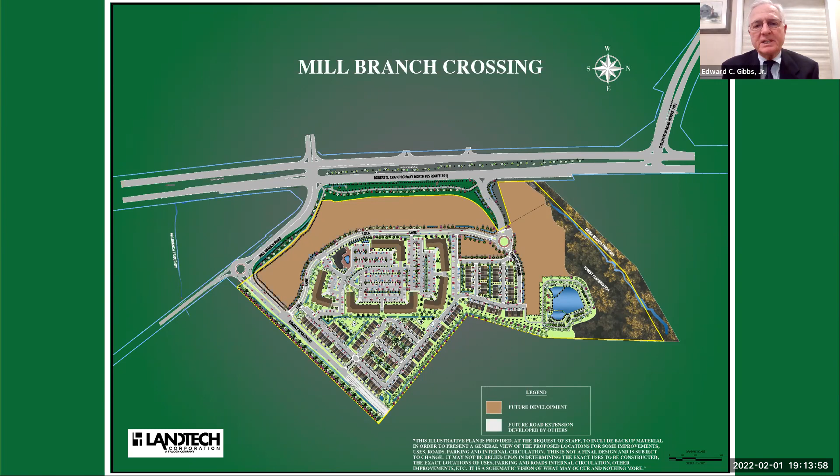The multifamily component of the project really is immediately abutting the east side of Lola Lane. Mr. Hoag, if you could help me out on that one. As you come down Mill Branch Road and hit the circle and turn left to come in on Ridgely, you will see the first intersection on your left will be Lola Lane, another private road. As you turn left onto Lola Lane, the multifamily units will be on your right side, and so you see them depicted here.

It's pretty interesting. The arrangement is 6 buildings, all U-shaped in their configuration. Then up in the upper left-hand corner, you'll see a smaller building, which is the Clubhouse, about 10,500 square feet in size.

So you see parking in front of the buildings. There is surface parking, but each of the 6 buildings also has underground parking in a garage. Approximately, and Kim Morgan can correct me if I'm wrong on the exact unit count, it's approximately 408 multi-family units. Am I off by a few there, Kim? No, Ed, you're exactly right, 408. Okay, thank you very much.

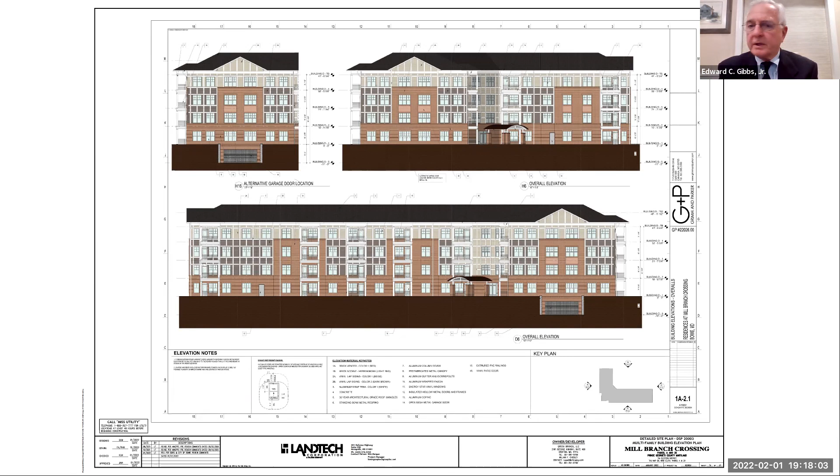Mr. Hoag, if you could go back to the immediately preceding one, there we go, thank you. So what you see in the middle there is the multifamily, and I will say that the clubhouse, which again is in the upper left-hand corner of the section, is right there.

There we go. Thank you, sir.

So that's going to include a fitness center, meeting rooms, community rooms. There'll be a yoga facility, and it will also include a swimming pool. So it's going to be pretty doggone nice.

I will say that the recreational amenities for the multifamily will only be available to the multifamily residents. They won't be available community-wide, because the multifamily builder is paying for that and including it in the project.

And then if you look at the drawing that we have up in front, you'll see a number of what look like rectangular shaped lots, basically on all sides of the multifamily component. Thank you, Mr. Hoag. And so those are 190 residential townhomes. They're all fee simple, to be sold and owned.

And all of the internal streets that serve those units are private, will be privately maintained by the developer during construction, and ultimately, once the project is turned over to the homeowners association, the private roads will be maintained by the homeowners association.

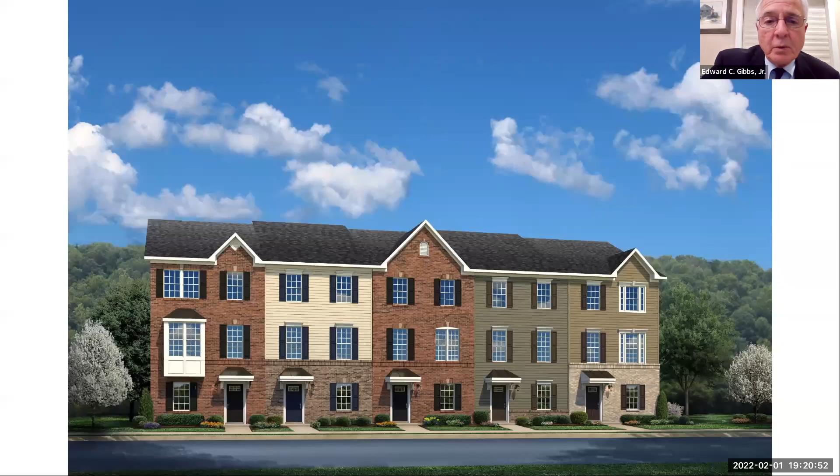And if I could, Mr. Hoag, if we could just move into the elevations for the townhomes as well, please. So we just have a sort of a sampling of all the different builders who have submitted elevations to be part of this project.

So it's quite nice. This particular elevation that you're looking at will be what we call a rear entry. So if you notice, there's no garage in the front. The garage will be in the back.

Well, but it's just a nice change of pace and gives a different look from the street, and I think adds certain character and charm to the community.

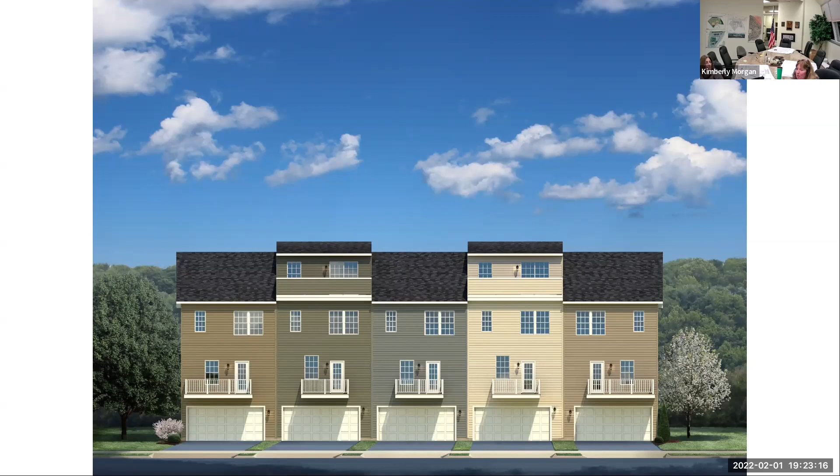They all have balconies, and some have special features up on the 4th elevation. You can see 2 of the units have special features up there. Are those actual walkout balcony units up there, Kim? No, I don't believe those are walkout units up there. Okay, it's like a special room. I think the architect told me that that's one of the places where people could have a home office. Oh, good. Okay, all right.

If you could slide down to the next one, Mr. Hoag.

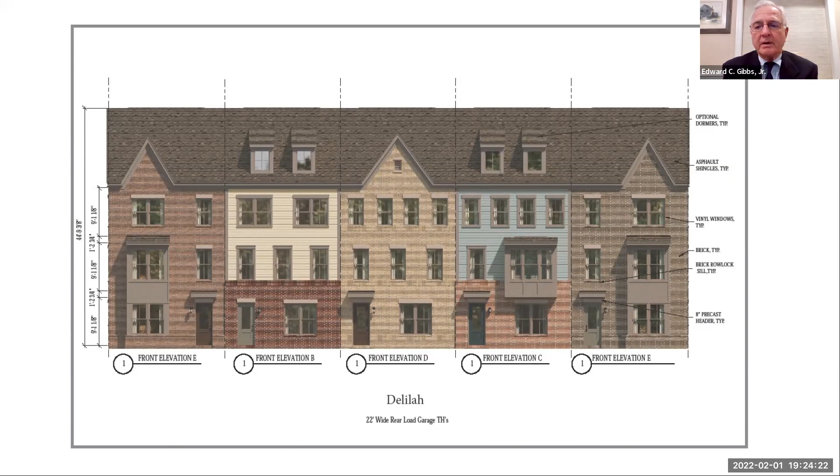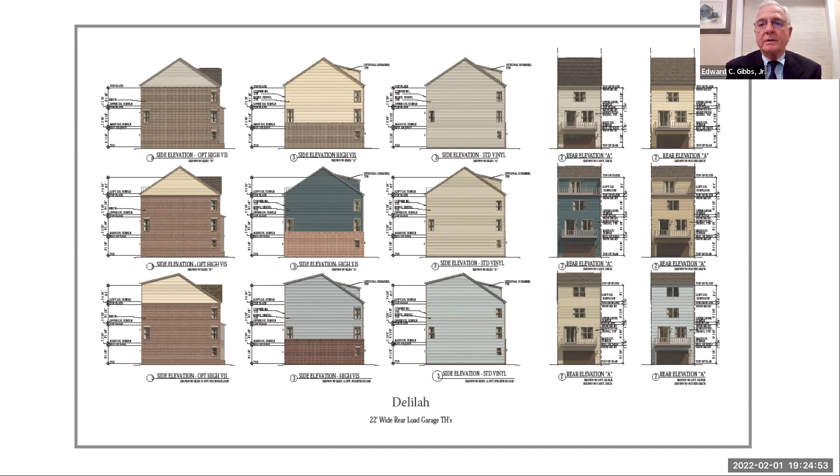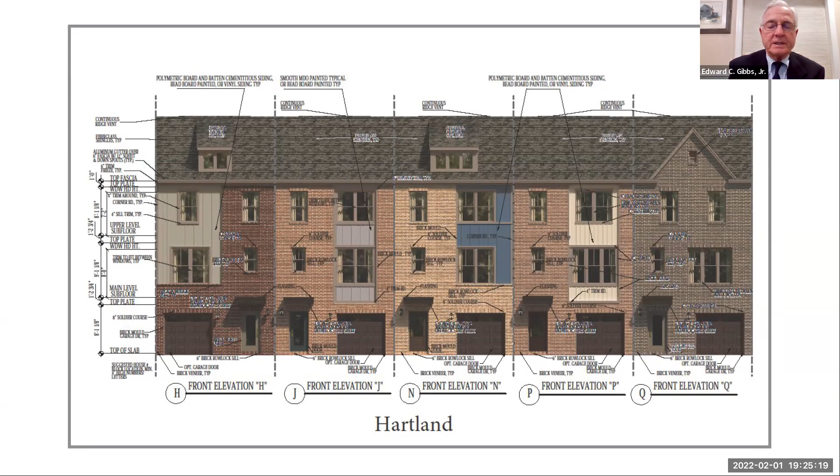If you could go to the next, Mr. Hoag. This is just a derivation of the Delilah that we saw immediately before, but the treatments are very similar from the standpoint of architectural shingles on the roofs and brick and siding combinations and fenestration that populates the facade readily.

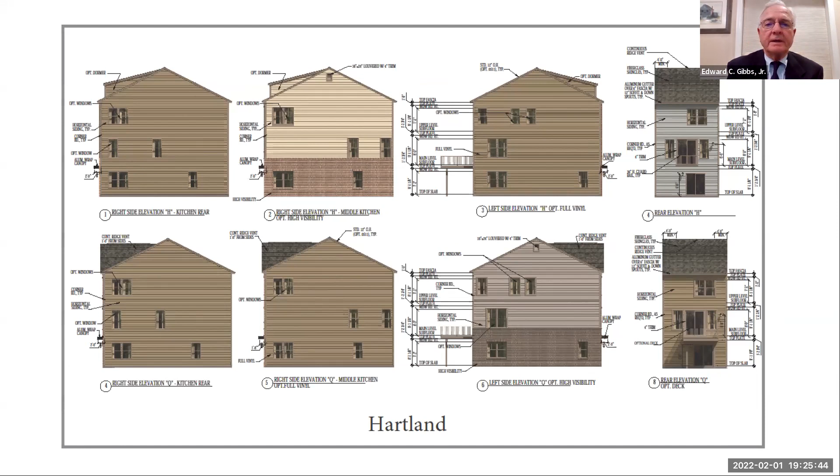Thank you, Mr. Hoag. Move along. Again, more side treatments for those units. You'll see a lot of windows on the sides. And again, some will have masonry treatments in high visibility situations. There's a couple elevations there that show you how the deck comes off. Those are, I think, front loaded units there.

Mr. Hoag, if you could go on. Okay, another, this is another set of elevations. And I don't know who this builder is. You can chime in if you have a handle on that, Kim. This is Lennar. Okay, Lennar. All right, so another quality builder.

But as you can see, the tone overall is a very traditional townhouse look. Lots of windows, either single or double car garages, gables, and steep roofs. And you'll notice that on all these, pretty much the units jog in and jog out so that we don't have a straight plane going across the front. That just adds to the architectural interest as well.

Do we have another one, Mr. Hoag? I'm not sure. We might be close to the end. Here we go. Is this Lennar as well, Kim? No, I believe this is NVR. Okay, all right, so then another quality builder, long established, building in Prince George's County and really everywhere, quite frankly. Headquartered in Northern Virginia.

And again, more of the same traditional style. These units also have tons of windows. You see the facade going in and out to avoid that one plane look across the front. If there's anything else, please bring it up. The next one, Mr. Hoag.

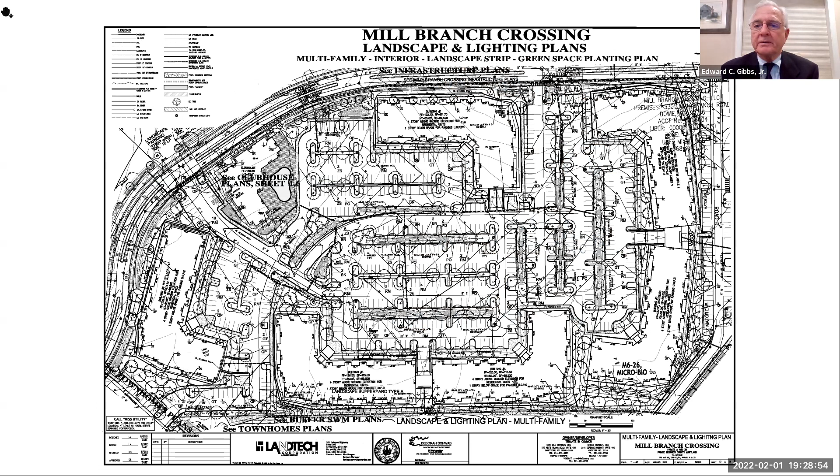Is there anything else? Yeah, the only thing left is the landscaping plans, and those are really kind of difficult to read because that's not rendered, so the rendering is much easier to read.

Okay, sounds great. Well, Kim, would you like to add anything beyond what I said, if I missed anything? I don't think you missed anything. The only thing I would add is that one of the things the City of Bowie requested was that we do the 12-foot multi-use path along the frontage of the property, and we have added that to the detailed site plan.

We also, I noticed that the rendering didn't really show the crosswalk at the intersection, but the detailed site plan does show the switchback that you mentioned, and there will be bike lanes across, as well as an additional northbound lane along the frontage of 301. The one thing also that I failed to mention, if we could go back to the site plan, Mr. Hoag.

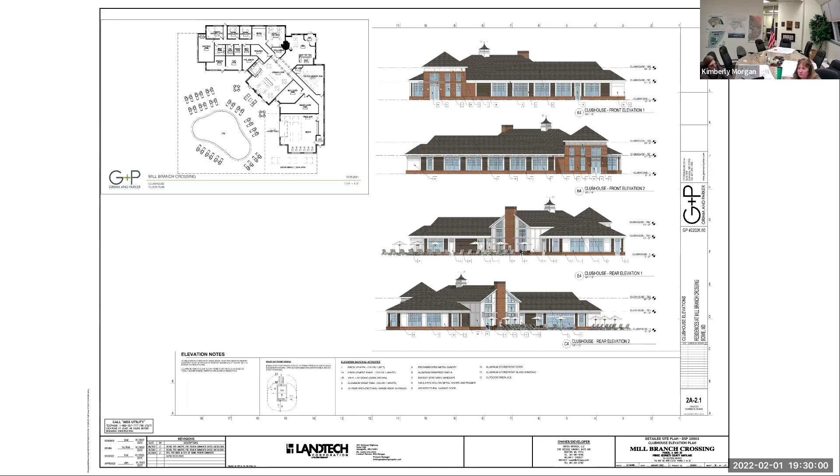Thank you. My throat was dry, so I had to get something here.

So what we did is we worked with staff, and we're satisfying mandatory parkland dedication with on-site private facilities. Obviously, mandatory parkland dedication is not something that would have been desirable anyhow, given the Green Branch Park, which is going to become a reality immediately to our east.

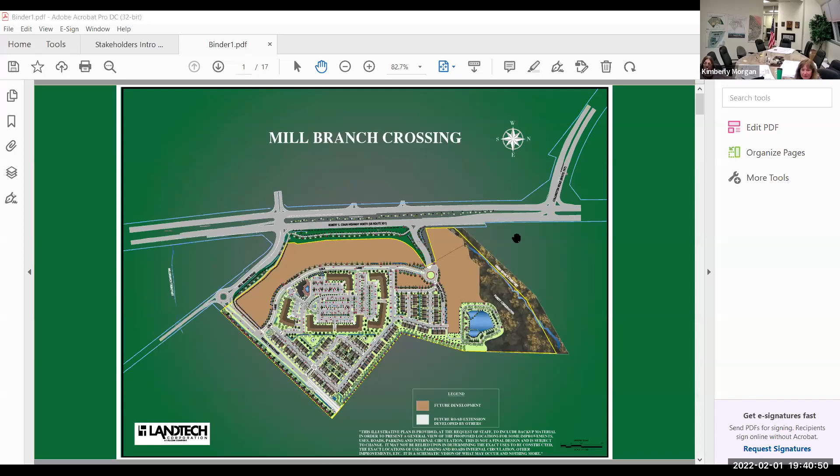Kim, if you can put up the site plan again? Anthony, could you put up the site plan? Perfect.

As Ed was explaining, you can't see my cursor, but from Route 301, Mill Branch Road from 301 down to the proposed roundabout will be 2 lanes in each direction. Then beyond the roundabout on Mill Branch, it'll be 1 lane in each direction. The private road that goes back to the park, I believe that's 1 lane in each direction. Kim, correct me. It starts out as 1 lane out, 2 lanes in, because we have that turn lane into Lola Lane, and then it's a 2-lane road.

Thank you, I hope that answered your question. Jackie, around the roundabout, is it 2 lanes going around the Mill Branch Road roundabout like Ed said, or is it different? It'll be 2 lanes coming around the roundabout, but one of those lanes will be dedicated to continue straight, and the other lane will have to turn onto the new private road. So it'll be 2 lanes coming around, but it'll end there, only 1 lane beyond the roundabout.

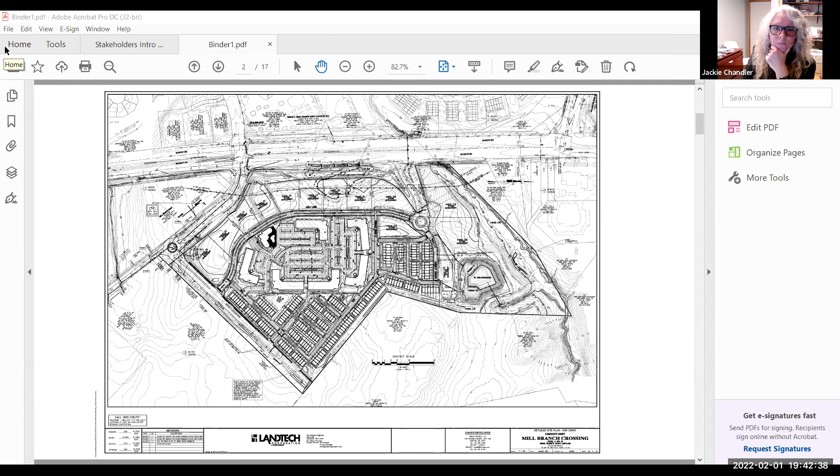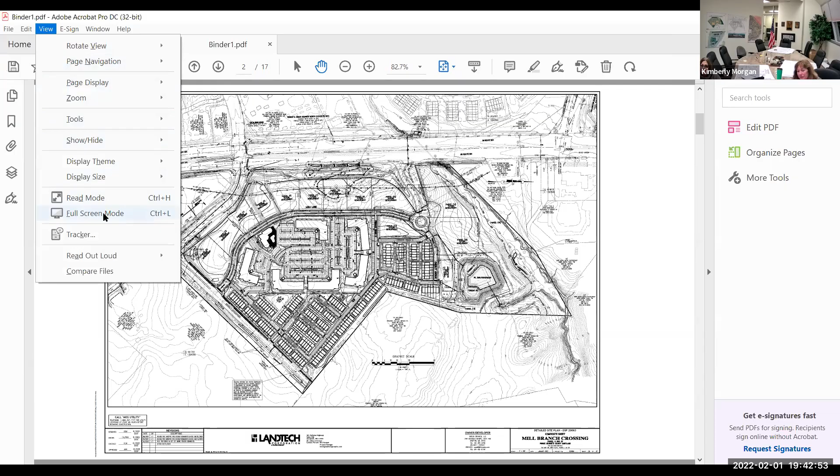This is Kim Morgan. I wanted to add that Mill Branch Road is considered a historic and scenic road. Our eastern property line with Ridgely Boulevard is considered the demarcation between the rural tier and the developing tier, so Mill Branch Road will continue to be its regular size as it travels east. We will be replacing a culvert further east along Mill Branch Road that's currently having some erosion problems, and we've agreed to do that as well.

Okay, that's great information, because I know that did come up when we had our previous stakeholder meeting for the preliminary plan. So thank you, Kim.

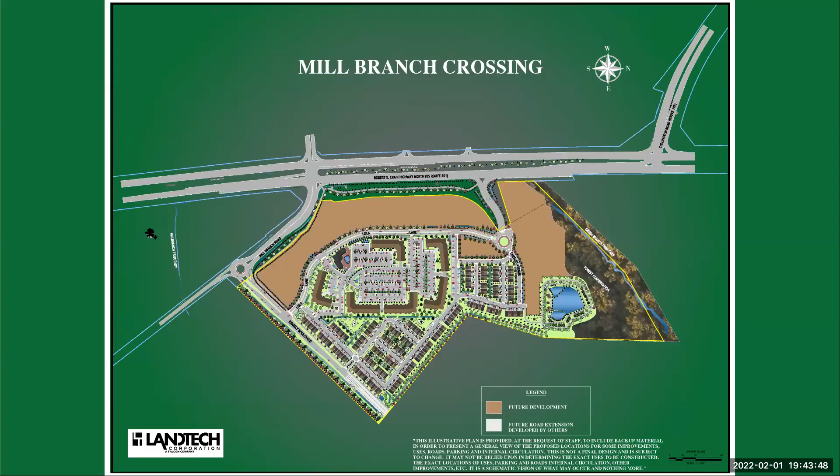I'm going to move to the next question asked by the stakeholders, and this pertains to the landscaping plan. Maybe we can go to that last slide, Anthony, the landscaping plan. The question is, what are the landscaping plans for neighboring properties, and what are the setbacks? Maybe someone on the team can describe how the adjacent properties are landscaped and set back.

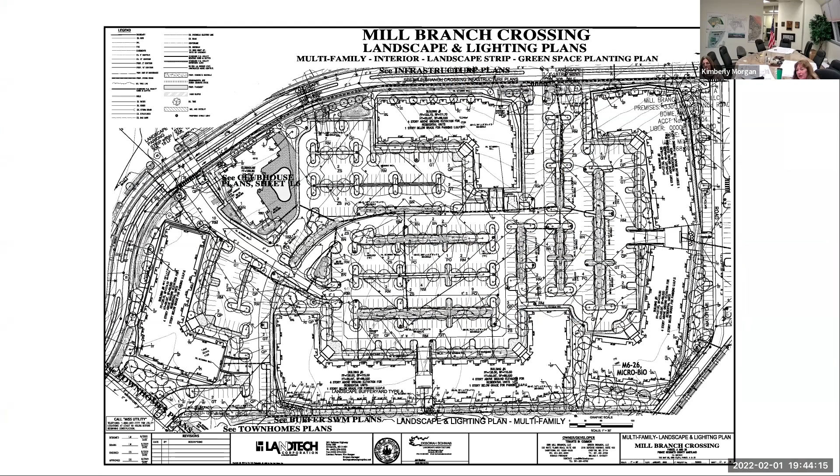I can somewhat answer that, and I think the better plan to go to is the rendering, the first slide, because as part of our tree conservation requirements, you can see along Ridgely Boulevard, along the eastern property line, just from the roundabout, there is a 50-foot buffer along that road, along all of the park. We have a 50-foot landscape buffer that will be considered tree conservation, but it will be planted with larger type plantings. So we do have a landscape plan that I can share with people. We've submitted that to Prince George's Park and Planning, and it is quite extensively landscaped.

What about the buffering and setbacks around the other side where you have the townhouses over towards the stormwater management pond? Is there a 50-foot buffer or a 20-foot buffer, and how is that landscaped?

There is a 50-foot buffer around the stormwater management pond. However, as you get closer to the pond, there'll be smaller plantings on the embankment because we have to have non-woody type plants along the dam right there. And then as you see the finger that comes up from Green Branch tributary, that is all huge mature trees. And along the Green Branch tributary, that will all remain in conservation area. In fact, that's already included in a recorded conservation area with our parcel A record plat that was done originally for the commercial development.

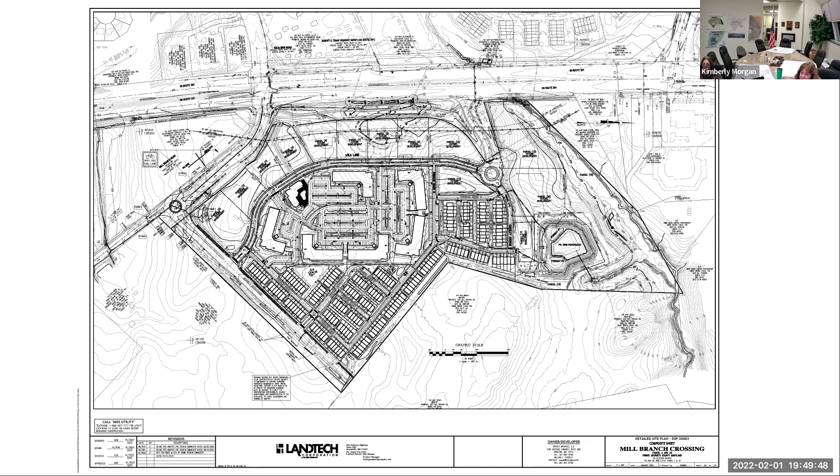Okay, so along Mill Branch Road, just to be sure, you described that the 10-foot wide trail that comes down Ridgely Boulevard, when it intersects with Mill Branch Road, will continue along Mill Branch Road down to 301? That's correct, that's a 10-foot wide trail off of the road. And then in addition to that, you do have 5-foot bike lanes on Mill Branch Road in both directions. Yes. Okay, I think that answers the question pretty thoroughly. Thank you.

Another question that came in is, what other approvals are required before construction starts? I know we're kind of at the end of the process with the detailed site plan, but Ed, would you like to discuss that?

Well, yes, Joe, we will need to first complete the detailed site plan process. Our planning board date is scheduled for March 24th, so we have to get the detailed site plan approved and finalized. Then we have to come back and certify the detailed site plan by making any changes necessary as a result of the planning board approval. Once it's certified, we can proceed to record plat. Once we get the record plat ready, we submit that for review by staff. They'll make comments, then we come back and they will accept the record plat after it has been signed by DPIE, and it will go to the planning board. After the planning board approves it, we can record the plats in the land records.

So timing wise, to get through the entitlement process, the land use entitlement process, if we get to the planning board on the 24th and get a resolution that becomes final, then we file the final plats. We're hopeful that we could be at a posture where the grading on the property could be occurring in the fall of this year.

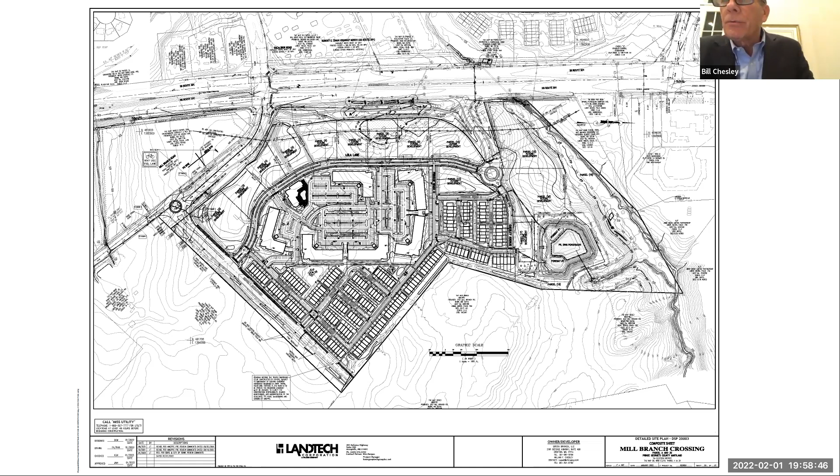I'm going to just recap the city's meetings, and if anybody wants to type a Q&A question while I'm going over those dates, feel free to do that, and then we can close out the meeting. As I stated earlier, the Bowie Advisory Planning Board is going to take up this detailed site plan, as well as a departure from the parking space size, at their meeting next Tuesday evening at 7 p.m. at Bowie City Hall in the council chambers. And then the public hearing before the city council will be Tuesday, February 22nd at 8 p.m., and again that's only on the detailed site plan. So those are the upcoming city meetings.

And Ed, you did mention a planning board date. Do you have a planning board date for the DSP? Yes, Joe, we do. It's March 24th. Okay, thank you.

Very good, thank you. And we did get a request from one of the participants that they would like you to meet with the Mill Branch Estates HOA board members. So they're going to take you up on that offer, Bill. They'll be in touch.